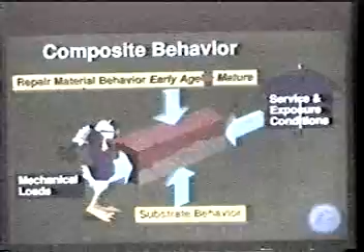This composite system of concrete repair is generally exposed to different types of loading: structural loading in case of structural repair, and all kinds of environmental loads, interior, because we are dealing with a structure with an already established interior environment, and also exterior. It's quite a complex combination, quite a complex structure, which is in fact much more difficult to analyze than new construction. In addition, it is not a static system, it's a very dynamic, living system, because everything is in constant evolution, changing based on temperature, humidity, all kinds of gradients, and a change in chemistry inside the system.

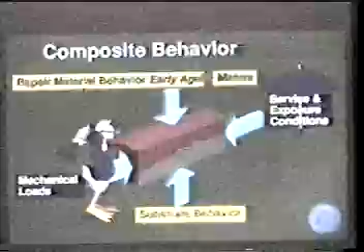So when we speak about any kind of composite system, which concrete repair definitely is, on the hierarchy it's probably at the top because it's a very complex one. In any monolithic structure or composite system, one of the necessary requirements for success of the project is achieving an adequate bond.

What is an adequate bond? It is achieved by proper conditioning of the concrete, and in the case of exposed reinforcing substrates, absence of a plane of weakness. It's very important, from the point of view of field operation, to achieve an intimate contact between the repair material, which is always, except for a few known exceptions, in semi-liquid phase, going through all kinds of transformation including volume changes. All kinds of stresses occur at the interface between this semi-liquid material and the man-made stone, which is the substrate, and these stresses actually occur on the bond line.

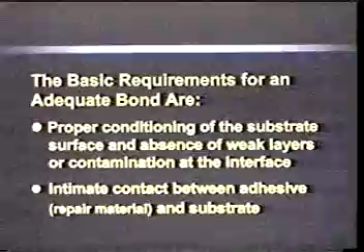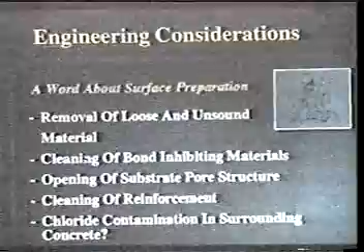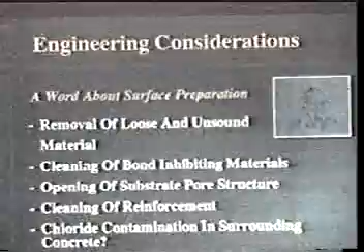The same here. Very often we have this problem, and I'm guilty as anybody else. So a few engineering considerations about concrete repair, as you well know - or if some people need to be reminded - removal of unsound concrete. And it's not only unsound concrete, as you well know, in order to keep certain common sense geometry and sometimes to undercut the rebars, which industry is pretty much following now, thanks God, so you have to remove also sound concrete.

Cleaning - very important, opening of the substrate material pores to receive new materials, and you really have this transition zone, which very seldom do people talk about. Cleaning and repair of reinforcing.

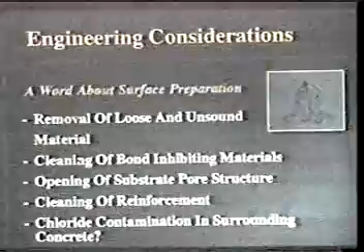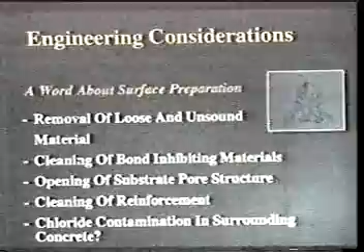Also, you have to consider an issue which is, by the way, not like carbonation, because as you well know, carbonation only affects the protective ability of the concrete cover to protect reinforcing steel, but otherwise it improves the quality of the concrete and densifies it. But densifying it changes the pore system, makes it denser, and it affects negatively in many cases the bond - in some cases significantly, in some insignificantly, so it may not be an issue.

And of course, presence of chloride contamination has nothing to do with the bond issue. However, it should be considered, because when you are removing concrete, chasing the bar until you come to non-corroded bar, you definitely are affecting the bond between the surrounding healthy concrete.

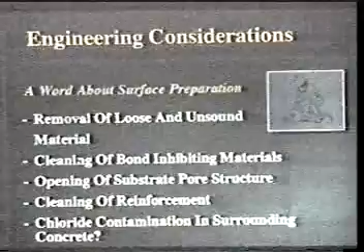Another issue is simply to have no contamination with dust on anything, and it is very high-tech testing. Take your hand and just see whether you have dust on it or not.

Another thing significantly affecting bonding, and why we are often not achieving a good bond, is that by impacting it with mostly electrical or pneumatic chipping hammers, we are damaging the surface. This is a lot, let's say, under serious magnification, but it is not usually on the macro level. On macro level, it's almost impossible to see after the final cleaning, but it is there on the micro level.

You have all this horizontal fracture or micro cracking and imperfections which very much affect the development of bond and strength of the bond. This is shown here as bruising. Usually, if you are not barbarically removing concrete, this doesn't affect probably more than 1/8 to 1/4 of an inch of the concrete substrate surface.

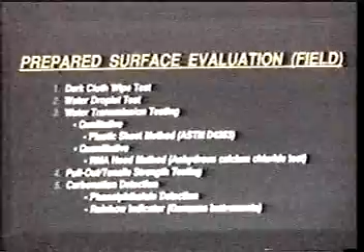So, evaluation of the concrete surface before you apply the repair material - I'm going to leave this discussion to only one method. There are two issues which can definitely affect the development and durability of the bond between old and new. Of course, I'm not going to speak about simple issues, or any kind of foreign materials or bond breaking materials.

But an engineer or a contractor has a tool today, a so-called direct pull-off tensile strength test, which initially was used for evaluation of the condition of the concrete, the strength of the concrete, the pull-out strength of the concrete. If you have any doubts, engineer or contractor, that maybe the existing concrete by its nature is not adequate to develop a certain bond - 200, 300, whatever PSI bond -

it is better always to be on the safe side and check by this pull-off test the strength of the prepared surface before it receives the repair material. This way, if you are not achieving it because of some problem, whether with the existing material or with the workmanship of the contractor, you don't have to remove it later on.

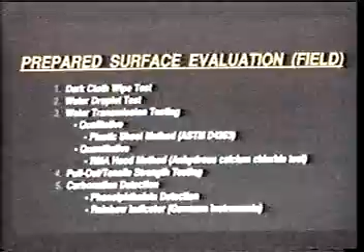You probably know and understand the situation that the failure in predominant cases occurs not in tension in this system, it occurs in shear. Because when you have volume changes in a repair material which is applied, as I mentioned, in semi-liquid conditions, in a layered system you have compression in one layer and tension in another, and the stresses occurring at the interface are actually shear.

But still, over the years, the industry found that this is the easiest, most representative test for field evaluation. Several other tests are being used, some good, some not very good, but for lab evaluation, which is a different ballgame, this one has a lot of popularity, it's a very good test.

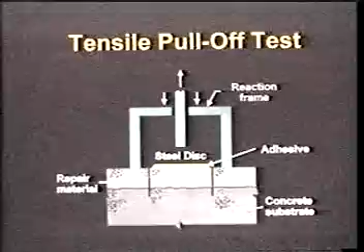So let's speak about this. This shows that you can do it in any location of the structure, overhead, vertical - very mobile, very easy to use.

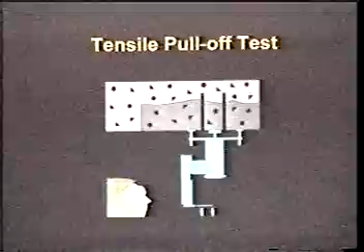Very useful test. This is one of the devices, actually modified by Structural Preservation Systems, a device manufactured by Hilti. It is a less expensive device on the market. It was not designed for the purpose of bond testing - it was designed for pull-out strength of anchors testing, but Structural modified it, and it is perfectly fine used in the field.

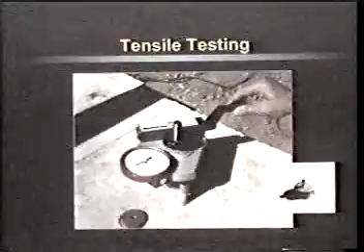In 1996, if my recollection is okay, the U.S. Army Corps of Engineers published a study on bond tests using different repair materials and also different apparatuses - more sophisticated ones like German instruments, which are expensive, and simple apparatuses like the one I just showed you, which is a modified Hilti apparatus.

What was done was actually just a little bit of information on it, because as the chairman mentioned, if you give me or Jim McDonald your business card, we can send you this report.

266 partial depth cores were extracted from the artificially produced repairs. What we had was precast concrete slab, and we filled the cavities with different repair materials.

We studied a different issue, but after the first study was finished, as a continuation, we studied how to measure the bond - actually the issue was not the bond developed numerically, but what are the deviations between different materials and apparatuses. So we did 77 repairs with 9 different repair materials and 3 testing devices, including a German instrument.

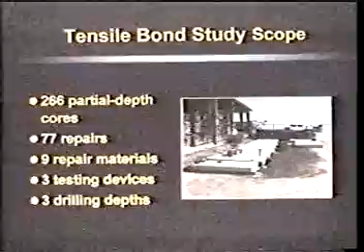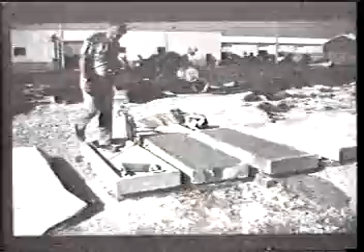This was the case - this is Jim McDonald checking it. We had 3 chiefs for each team who was working on it, so it was strict quality control, which you never have in the field.

Also notice that we never have in the field such a smooth substrate as we have here, and almost from all practical points of view, the repair surface and the substrate are parallel, which we never have in the field.

So this is how, with the Germann instrument, we were running the test - this particular one is in Arizona. We also ran it in 3 different environments: one in South Florida, one on an Arizona job site, and the third in Chicago.

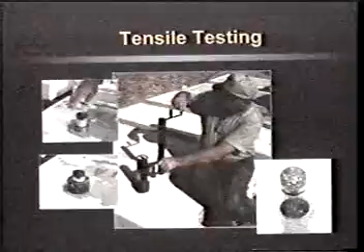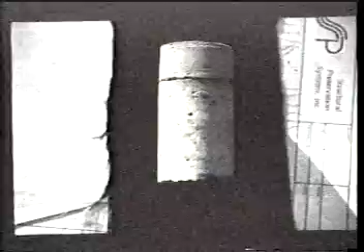This is how a not very successful repair looks - just to give you an example, you can see a very definite borderline between old and new, and I can assure you this repair is not going to last. You can also see the failure occurs at the bond line, which in this case is where the numerical value in PSI starts to work.

And this is a very good repair - you see two different materials, you can judge it by the size of the aggregate distributed in the cementitious matrix, but there's no borderline. It's a very smooth transition. This is what we are always trying to achieve - not always successful, but this is the goal.

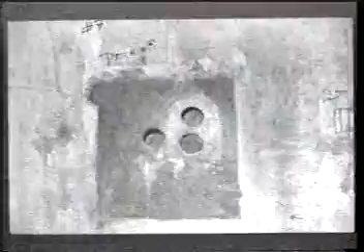When we are extracting these cores - and this is what we did for each particular slab - we did 3 different pull-offs with each apparatus. So actually each slab had 9 such holes, since we were using 3 apparatuses.

Now, before I speak about a very limited amount of results I'm able to tell you, based on time restrictions I have, I want to return to how we are judging with the numbers, how we are following the numbers. I'm trying over the years to understand myself, and always asking questions.

If somebody in this room can help me - why is a bond achieved with, let's say, just to throw out a number, 200 psi, better than 100 psi, only because it is larger? Actually, what is the goal in a bond, in this monolithic action?

I think the goal is, number one, to have a lasting transfer of stresses between the substrate and the new material, the repair. And second, as I mentioned, to have a lasting bond - this is from a durability and structural point of view. You need a lasting bond for the service life of this repair and overlay, a lasting bond.

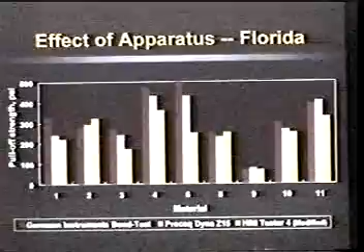A few years ago, I had a project - it is not in the slides because it was a very, very secretive defense project. I'm finishing, 2 more minutes.

In Alabama, it was a government project, Pentagon, U.S. Army Corps of Engineers was involved, Westinghouse, Bechtel Power Corporation. It was new construction, and there was a serious problem with a blast-resisting wall just constructed. So it was a question of whether to remove and replace this unfinished wall, which would cost $3 million extra just to remove and replace, or try to fix it.

There was a difference of opinion, and we decided to come up with pilot repairs to this wall. Again, I don't have slides of it because I'm not allowed to show it. As a consultant, I specified knowing that we had to demonstrate - and politics and media, TV was involved in it, so it was an awful project from many points of view.

So what happened was, when we did this pilot repair to demonstrate that we were doing an excellent job and that it can survive as designed even when repaired, I specified 200 psi. All the parties in the meetings approved this number. Everybody loved it, larger is better. So when we tested it, and I tested it myself surrounded by probably 40 people with cameras and everything, instead of 200 psi, I got 187 psi.

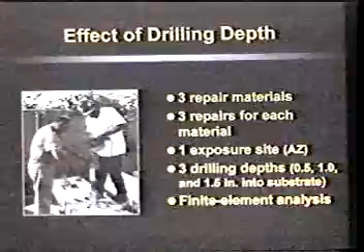So it was replaced with another one, and thank God we got more than 200, so it was perfectly fine. Everything was the same - probably the spot we selected was luckier than the first one. This is why it's so important to use common sense. And yet we keep these procedures and requirements all over, throwing out these numbers everywhere in industry documents. This is why we have to understand the limitations of this very good test.

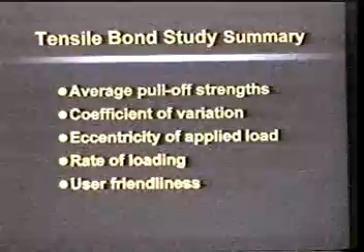This is a summary of the study - this is a very good quality control test, but it does not assure the main goal of durability. It should be used with full understanding of what it is for. And the recommendation - it is a preferred method - this is a recommendation not of this presentation, but of the study itself.

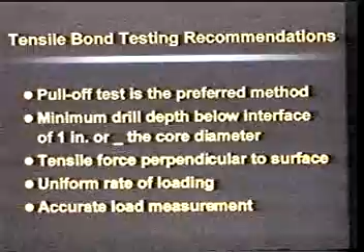Now, concerning the depth of drilling - in this study, which was probably the most extensive to my knowledge, we found that depth is extremely important, as everyone else who studied this found, but we found it should be deeper than in existing European standards. It should be 1 inch, or half the diameter of the dolly we are using. Then we get a much more realistic picture, with less effect of different factors and stress concentration than with shallow drilling into the substrate.

It is probably the safest, but not the best. How do you find out which one is best? Sometimes it's bone dry, sometimes it's slightly sprayed. It depends very much on the material in the substrate, and it depends to a large degree on temperature and humidity at the time. So what's the way?

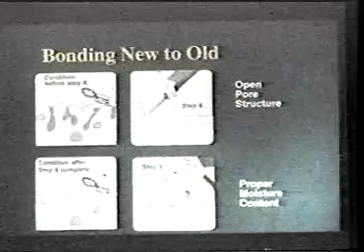If you have time and money and want to achieve the best possible result, you have to run 3 different pilot projects on small areas with 3 different moisture conditions, then run this pull-off test and find out which one is good. If you see 10-15% difference, it's irrelevant - it could be deviation in the apparatus or other man-related factors in testing and repair.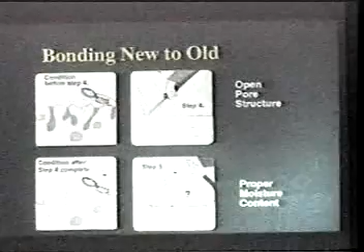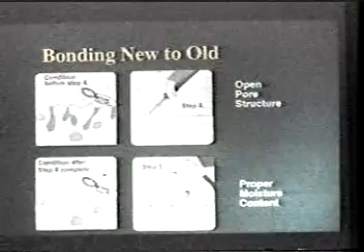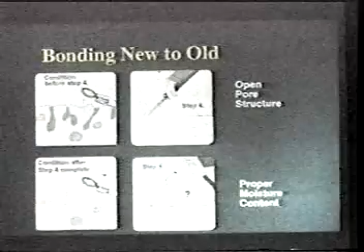So just look for a substantial difference - where you have 25-30% difference, you have to act on it. Moisture conditioning is very important, but the only recommendation at this time is a pilot project. What's the best way? If you don't have time, money, or agreement with the engineer or owner, just use saturated surface dry.